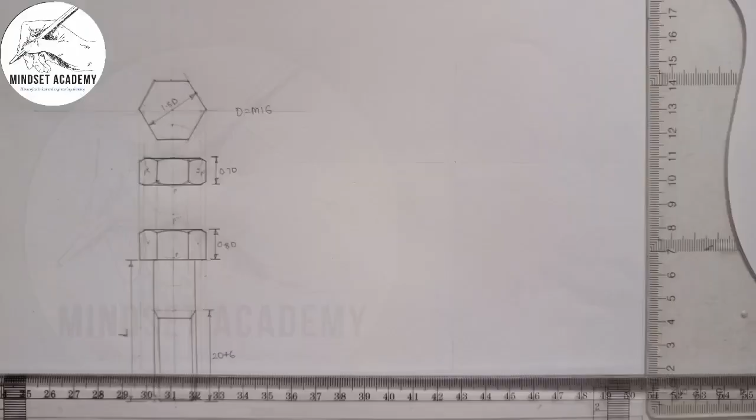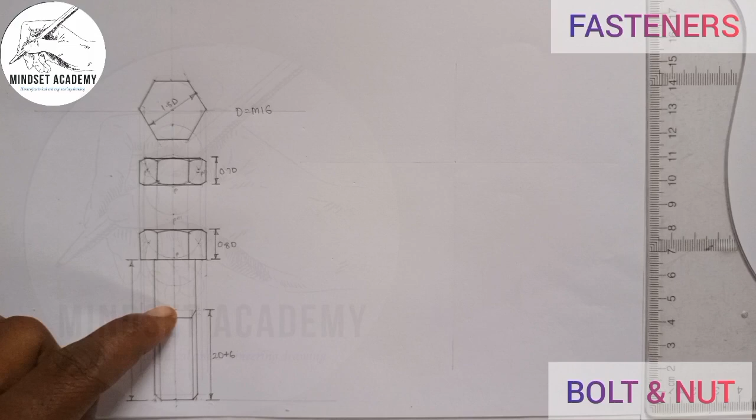In the previous video, we solved the problem involving a bolt and a nut that are constructed separately. A bolt is the component that has a shaft and a cap, while the nut is another component that has a hole. It fits together to tighten two or more materials together.

Now in this video, we'll solve another problem. This bolt and this nut are fitted together, and this particular bolt we're about to use is a washer face. This one is not a washer face. Is that okay?

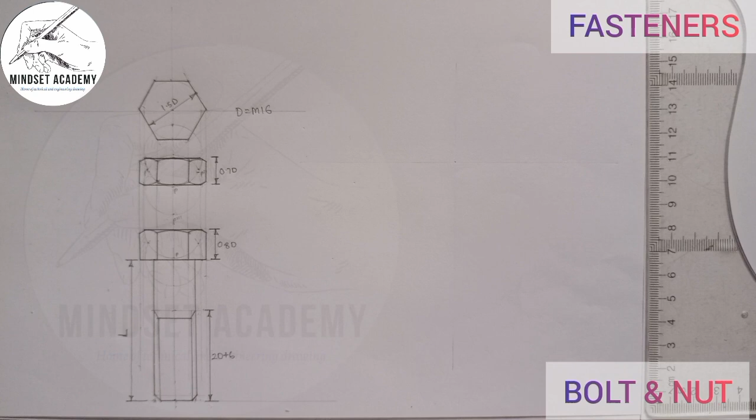So the question goes like this: construct a hexagonal headed bolt M24 with washer face head and a nut on it. Give the standard dimension and show your calculation.

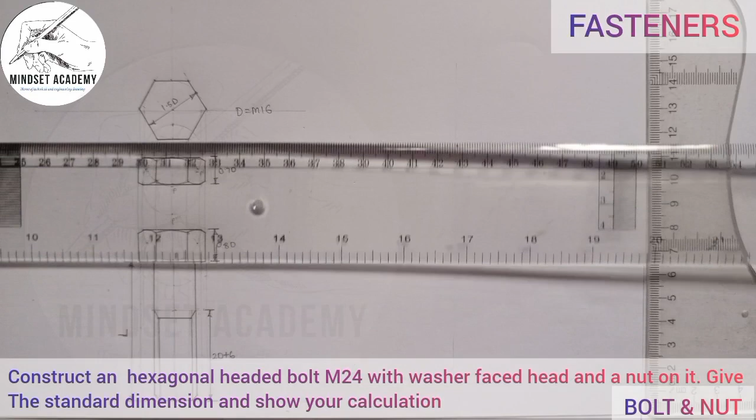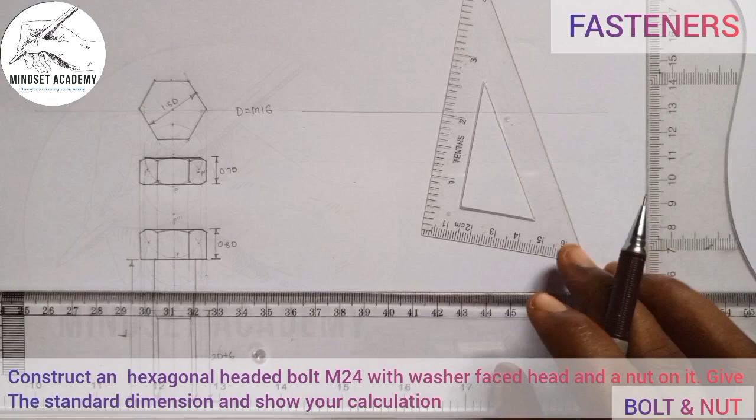So the first thing you should do is to draw your horizontal line this way. That's the first thing you should do. And the next thing you should do is draw the vertical line that goes through the horizontal line in this manner. You can decide to use this.

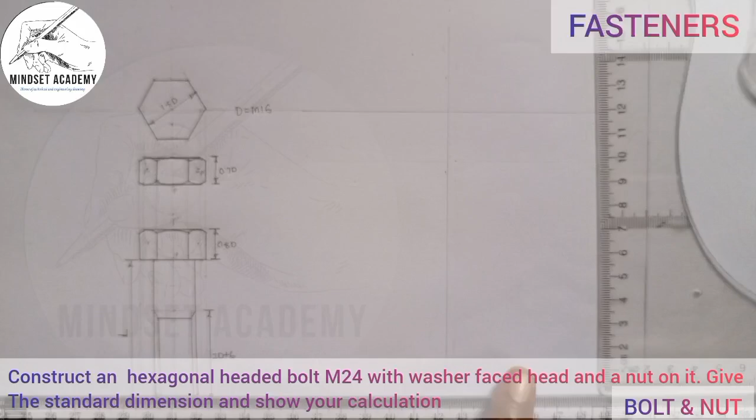And I'm going to draw this. Let's just take it down very well. You can see this is where it is meeting. And we are given it to be M24.

So to get the diameter, you multiply 24 times 1.5, and that gives us 36. So to draw a circle, you need a radius, and I'm going to measure the radius of 18, which is half of 36, and place it at this point here.

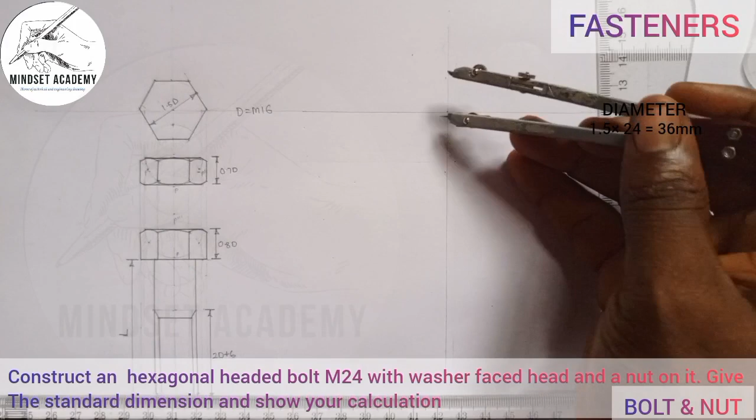Then I'll draw a circle. But normally the circle is always faint, I just did this way to show you.

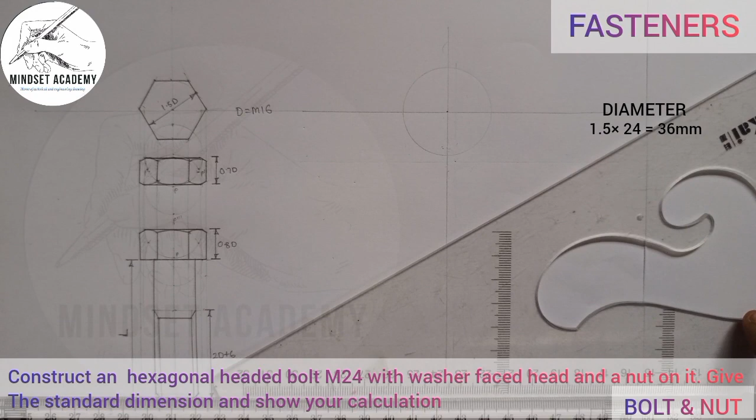So now the next thing I'll do is draw a hexagon across flat. I'm going to use this guy here, which is the same thing as this, the smaller version. Is that okay? So I'll just place it this way. Let me stand it up, and I'll place it this way.

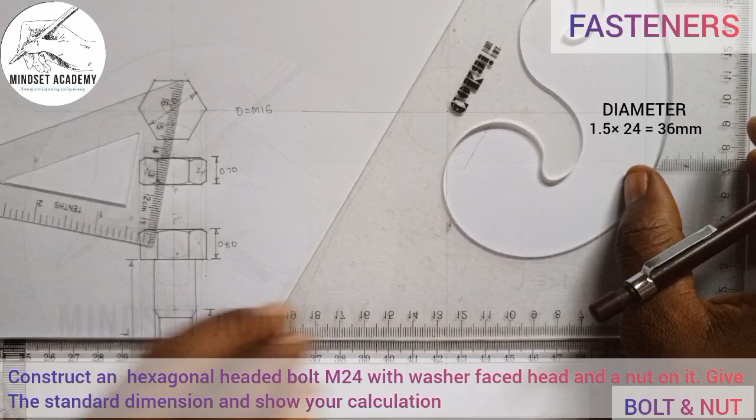Draw a line that is giving me this way. I'll come here also and do the same thing, moving it on my T-square. I'll have this way, right? And I'll come the other way around, and I'll have this way. You can see that? And I'll move it here also, and I'll have this way.

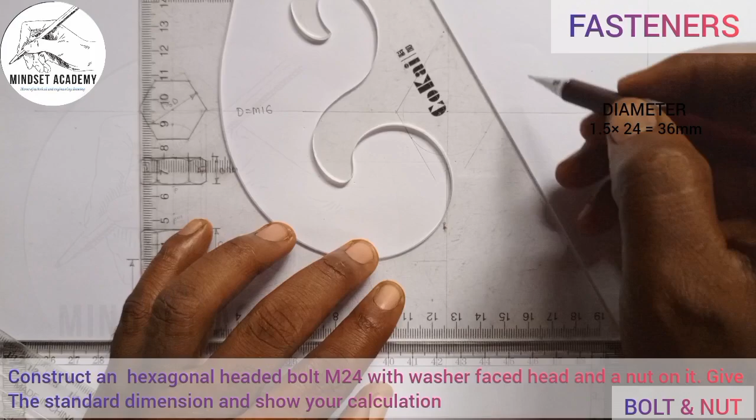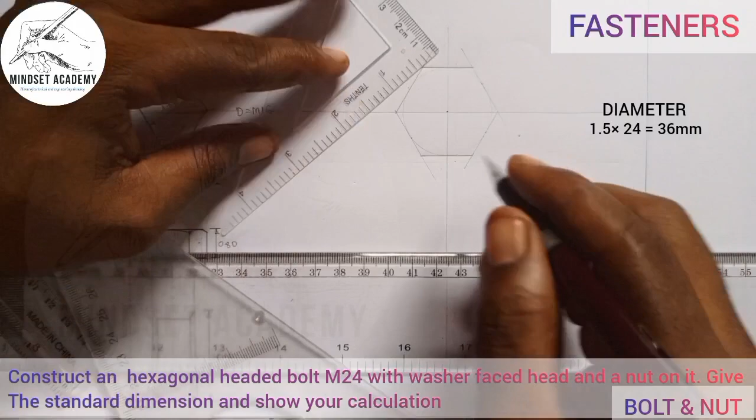So the next thing I'll do is thicken it from here to here, and from here to here. The rest, from here to here, from here to here, from here to here, from here to here. This is what we have here.

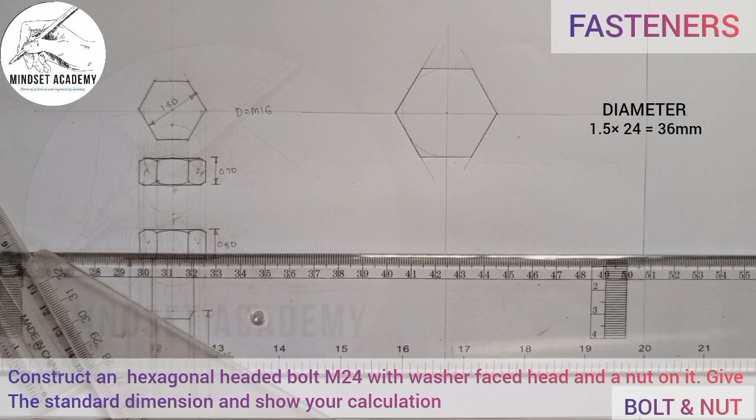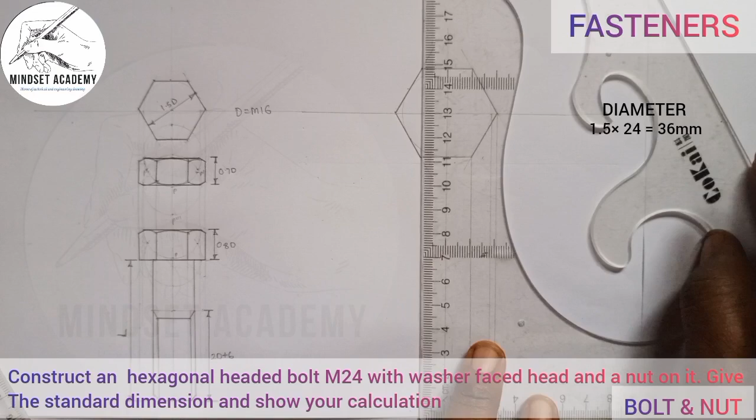Now the next thing I'm going to do is project this point down, each of those points, including the circle, the edges. Then this is what we have here.

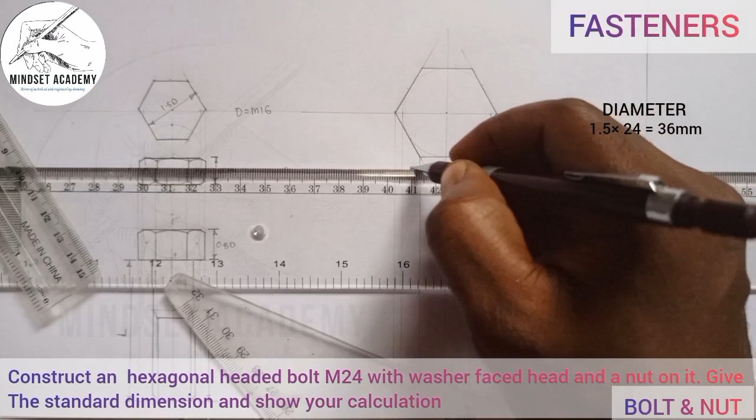Then I'll pick any distance of my choice, as long as it's not touching the plan. I'll just join the first point to this, that is the second point to the second to the last. And the next thing you do is know the thickness.

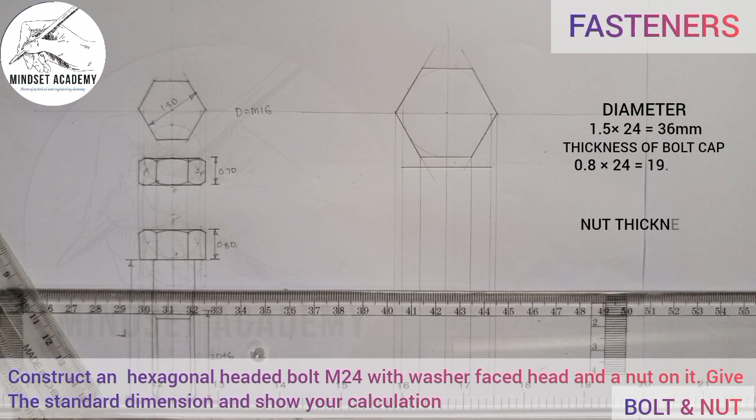That is the thickness. But now, don't forget we're dealing with the bolt, so the thickness of the bolt here is 0.8D. 0.8D means 24 times 0.8, and that is 19.2.

So I'm going to measure 19.2 as the thickness of the cap. This is 19 here, right? And I'm going to just draw my faint line first of all, this way, then I need to draw this cap very well.

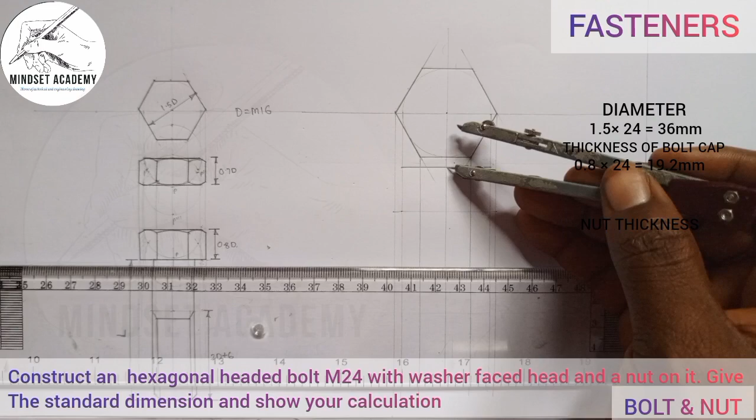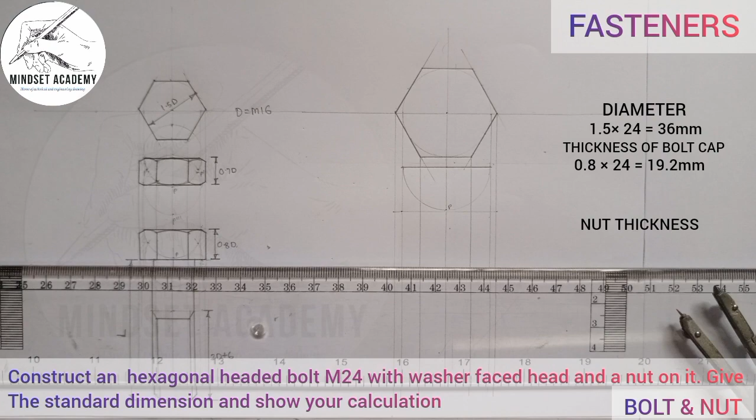So I'll take my compass to this point here, then I'll draw. You see that? And they're meeting here, that point I'll call point P, a silent P. Then from that same point, with the same radius, without adjusting my compass, I'll place it at that point P and draw another one again.

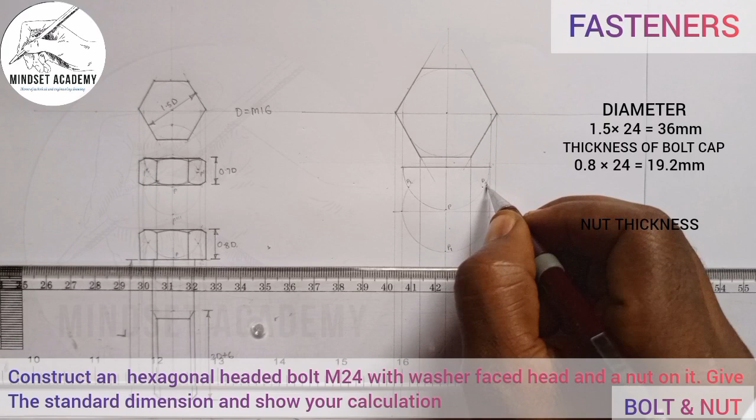Right, so I'll call this point P1, this one P2, this one P3. So from P1, I'll place my compass there, take it to the top here, tangential to that point, and I'll draw an arc this way.

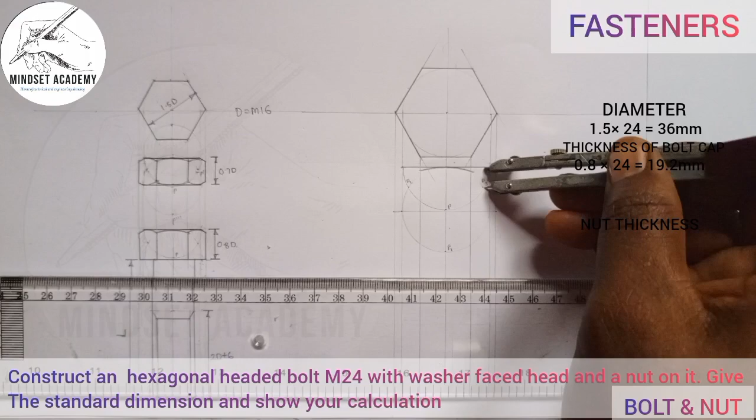I'll place it at P3 also, take it to this point where I can easily draw this way, touching this line there. You see that? Then at P2, the same thing is happening this way.

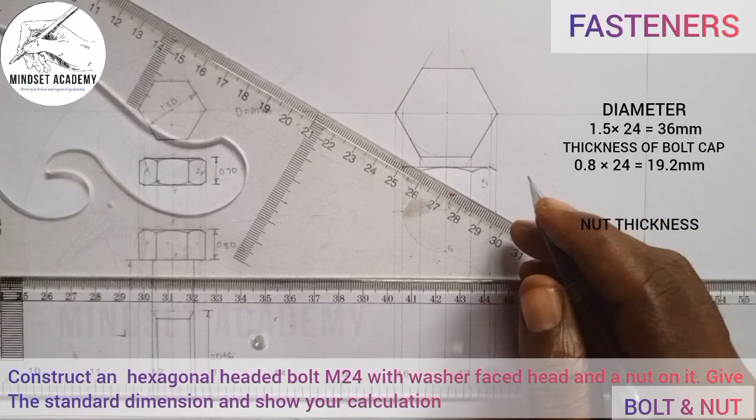Now the next thing I'll do is take your 60-degree set square, place it at an angle of 30 degrees. You draw the chamfer where you filed the edges, you call it the chamfer. Now come here this way, I'll chamfer it at an angle of 30 degrees, right, and bring it down this way.

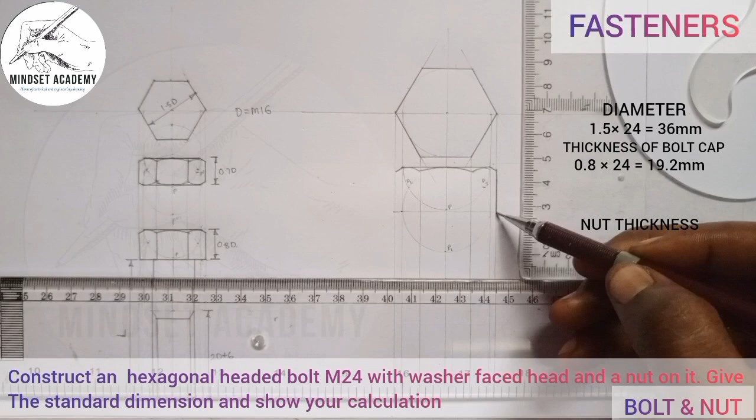Before I do that, I need to measure 10 millimeter - I mean like 1 millimeter up, because it's washer faced, right? So this is what I'm going to do, I'll just measure 1 millimeter up.

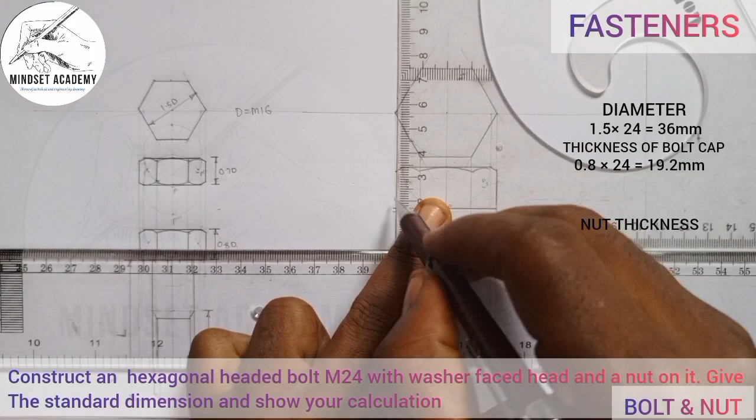Can you see that? Then I'll now draw it from this point, taking it straight down to this point, right, then bring it down. That is the standard - the 0.1 millimeter is the standard.

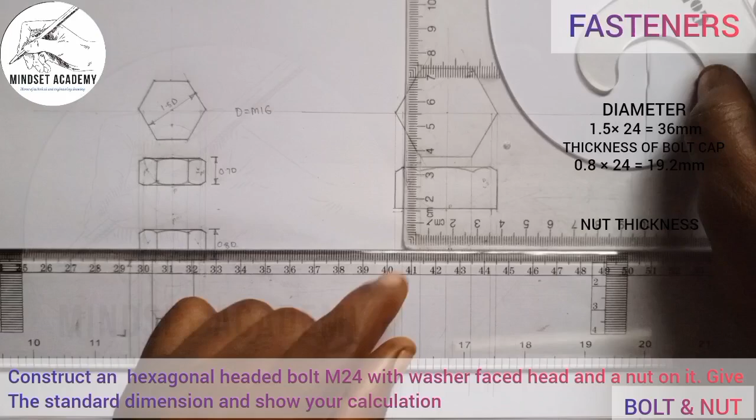So the next one will now be this point here, I'll bring it down. This point here, I do the circle, bring it down. So from that point, I'm going to just draw this to this point. You can see that? So this is what we call a washer faced.

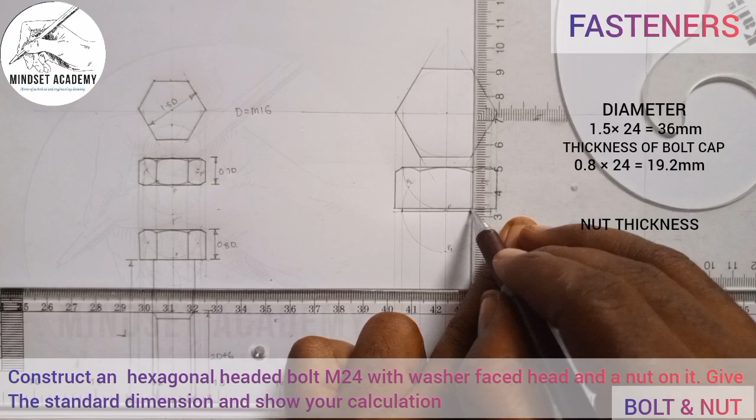See the difference? Now have this - is it different? This is just a bolt. This is a bolt, a washer faced bolt.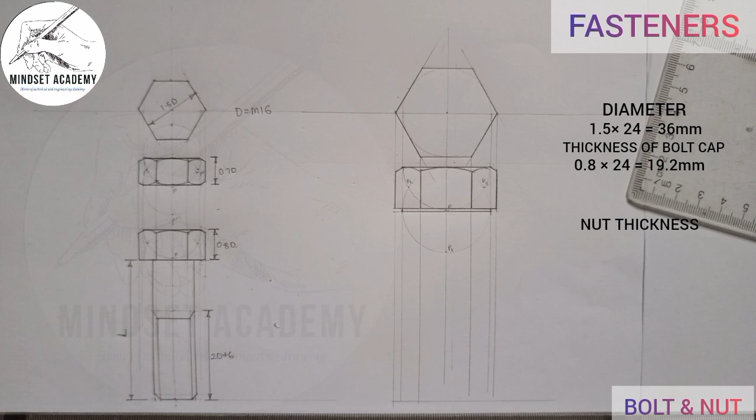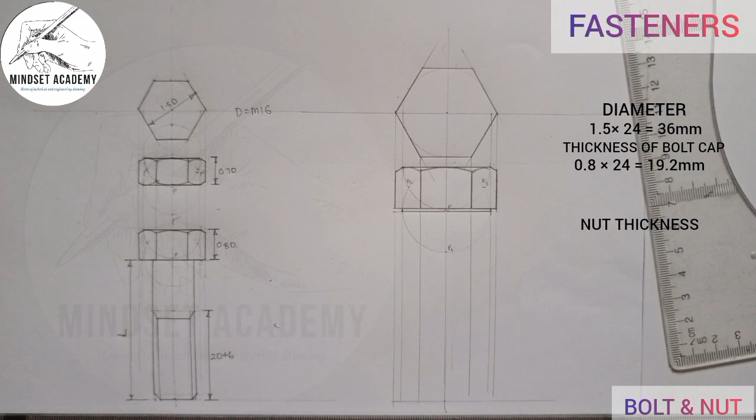So when I do that, I'll place it at this point, right? Since it's 24, I'm going to take my meter rule. I'm going to measure 24, right, half of 24 this way, which is 12.

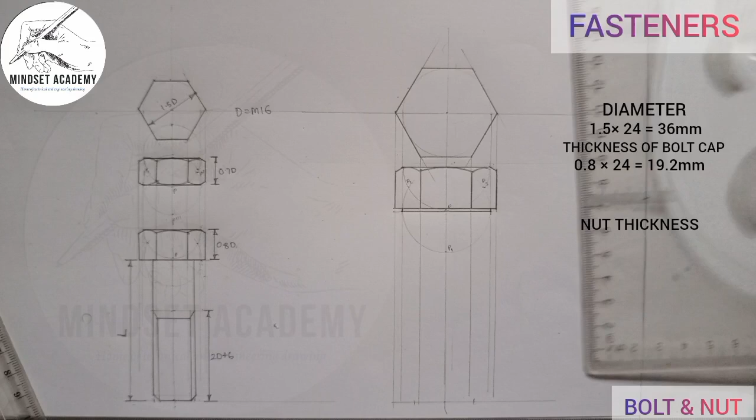You see that? 12. And I'll place it at the center line here. I'll mark to the left 12, also mark to the right 12. You see that? And I'll take it up. That is it, 12 and 12.

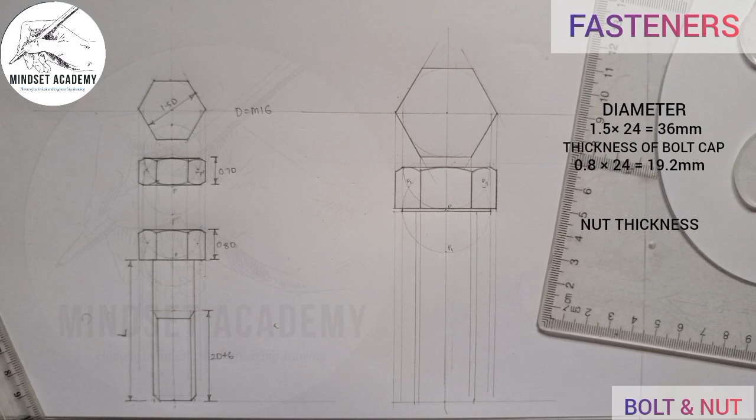Now the next thing is I'll measure 2 millimeter up. So again, I'm going to measure 2 millimeter up on that line - this is 0, 1, 2. So there's the line there, 2 millimeter.

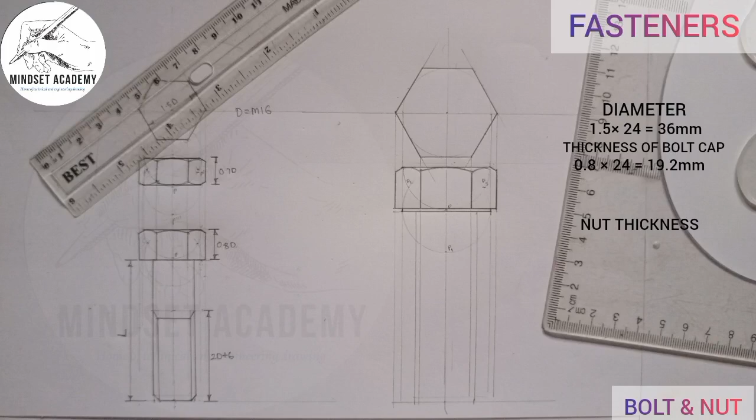Then I'll draw a line this way, so I'll bring the line to touch the base line at an angle of what? 45 degree. So I can use this and do it at an angle of 45 degree this way, and here also this way.

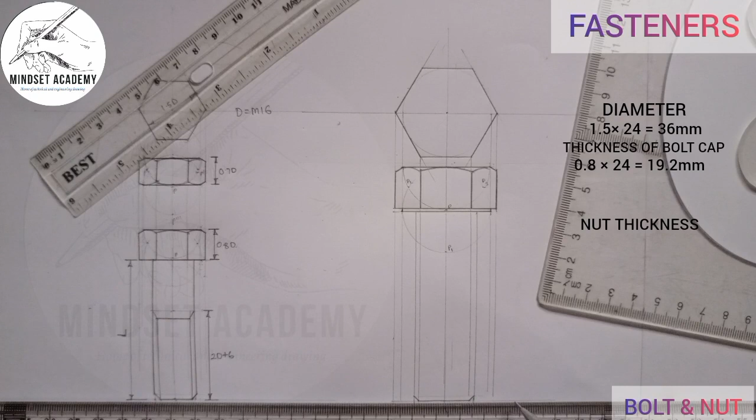Then I'll thicken it this way, right? I'm going to thicken it this way too, right? And it's already going up, which is already there.

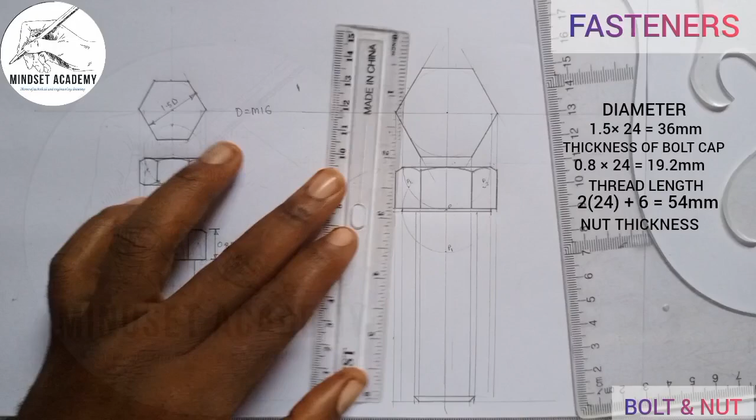I want to know the length of the threading, and it's always given - since it's not more than 125, you'll be using 2D plus 6. So 2D plus 6 will be 2 times 24 plus 6, and that will give us 54. So I'm going to measure 54 from that point, from 0 to 54. This is 50, and this is 54 here. So that will be the length of the threading.

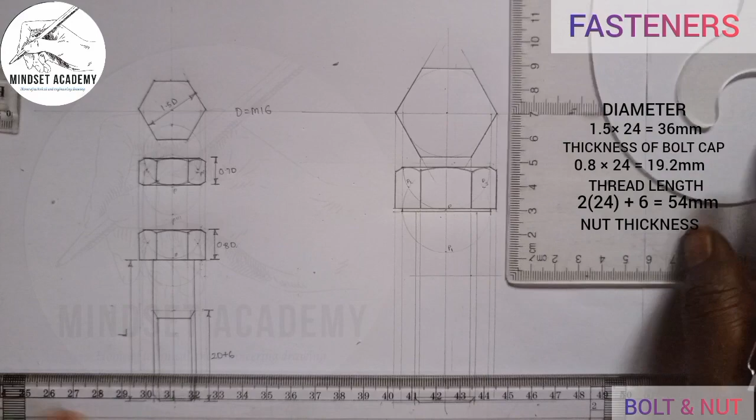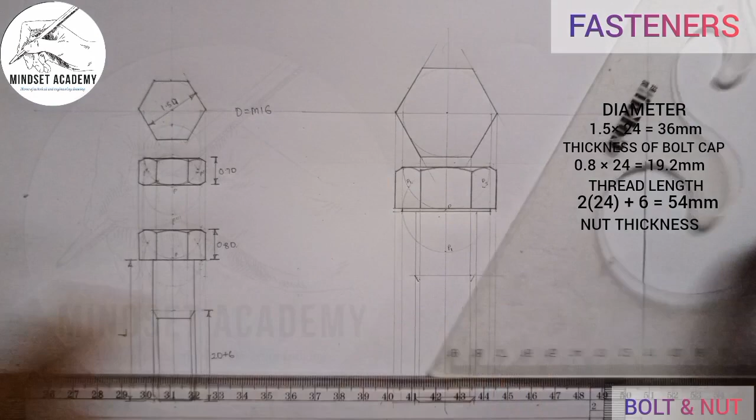So I'll just get this way, right? So from that point, I'm going to bring it down at an angle of 60 degree downward. You can see that, and I'll take this way also, an angle of 60 degree downward. Then I'll just join here.

Now, why I'm not taking them is because we are told that the bolts and the nuts are together. So taking them together, I want to put them together. So I can just choose any distance here to place my nuts. I can just draw a line at this point this way. Any line at all, but don't forget it should be the same length as this, since this is stopping here, so we're having the same length.

Is that taken? So what did I do the first time? I'll now join this last point, which I join here, to this point also. So taking it from this point straight down to this point.

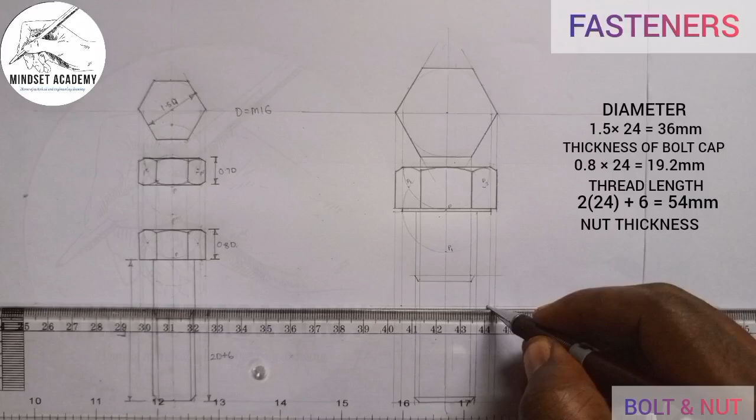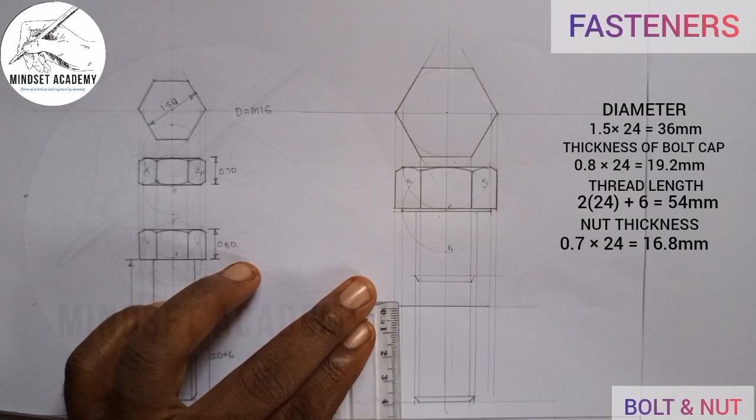You can see that. Now the thickness should be used, since what I'm using for the nut is 0.7. So 0.7 times 24 will give us 16.8. So I'm going to measure 16.8 from this point. This is 16.8 here, and I'll close it up back again.

The same thing, I'm taking it from this point straight down to this point. Now I'm not doing the same thing I want to do. I'll place it at the center here, just at this point, and I'm going to draw a semicircle.

Where it meets here, do the same thing. I'll draw another semicircle, you see that? So this point here is P. From P, I got P1. This is P3. This is another P2. So from P1, I'll place my compass at P1 to this point.

I'll draw, this is the line here. Look at that line. This is where to stop. Can go to that point, to the next one. You see that? Then I'll place that at P3.

I'll do the same thing, this way. You see that? I'll come to P2, radius here too, do the same thing.

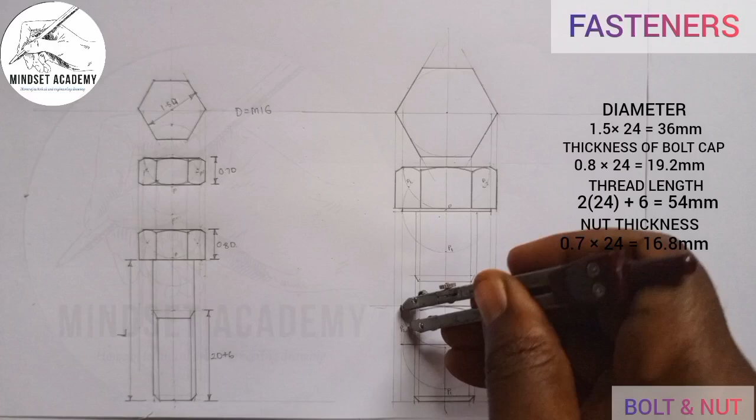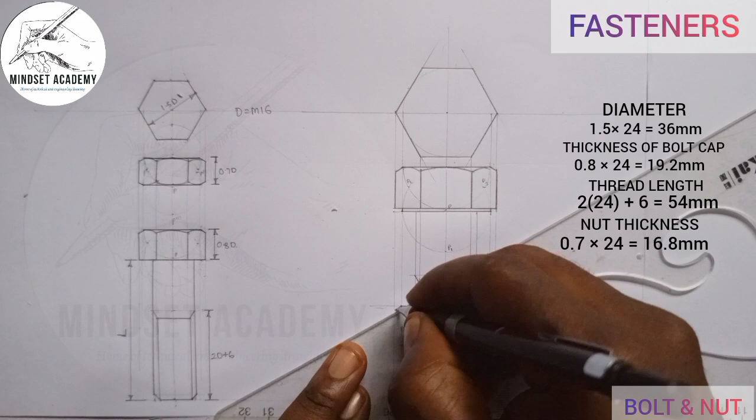You can see that. Now the same thing, I'll now chamfer the edge here with the help of this 30-degree set square. I'll chamfer this edge, and also I'll chamfer this edge. And what I did here, I'll do it for the other side too.

Now I'll place my compass at this point here, and I'll draw the semicircle facing the one this way. I'll draw this way. I'll come here, I'll cut this way.

So what do you notice? It is meeting at this point here. Call it P3 again, and it's meeting at this point here. This is another P2. Then we have this here.

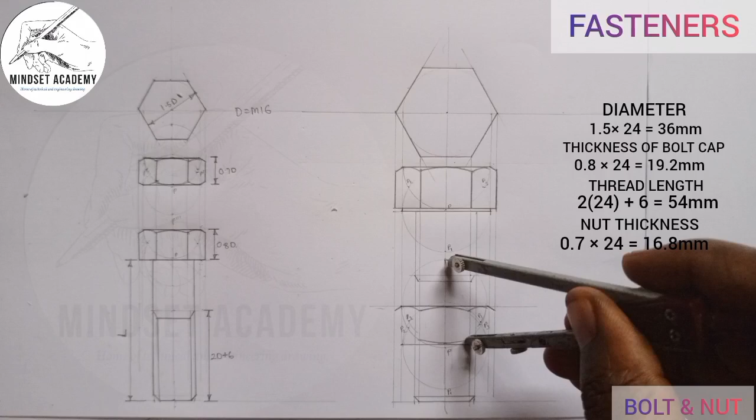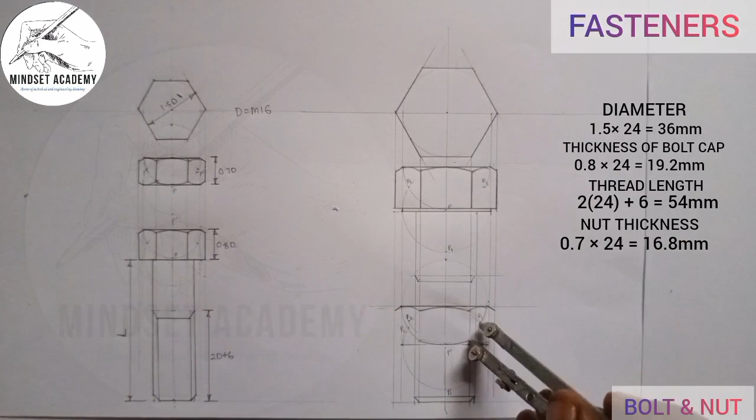So place my compass at this point here. Take it here to do the same thing, repeat the same process. I'm going to now come here. After I've done that, I'll come here, I'll do the same thing here. Then here too, I'll do the same thing.

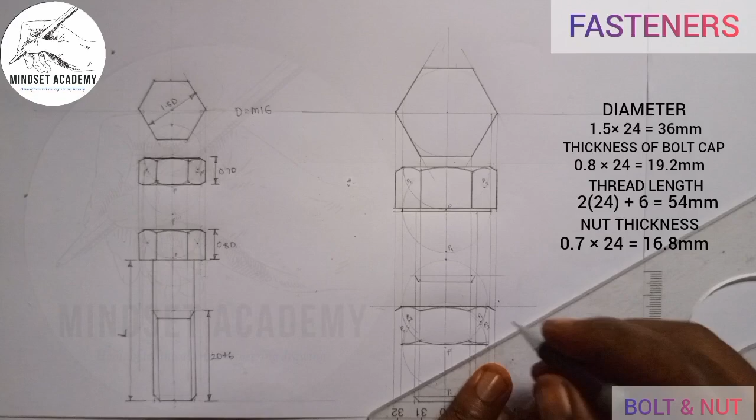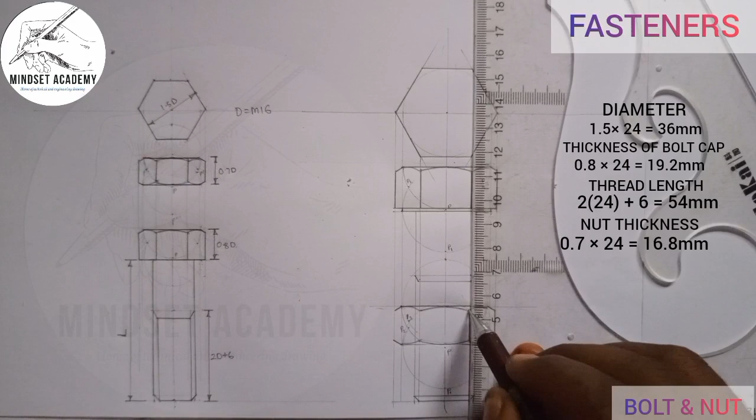Now I'll join. I'll chamfer here first of all before I join. Chamfer here. Come here. Chamfer here, and I'll close it up. Close it up. Close it up. And close it up. You can see that?

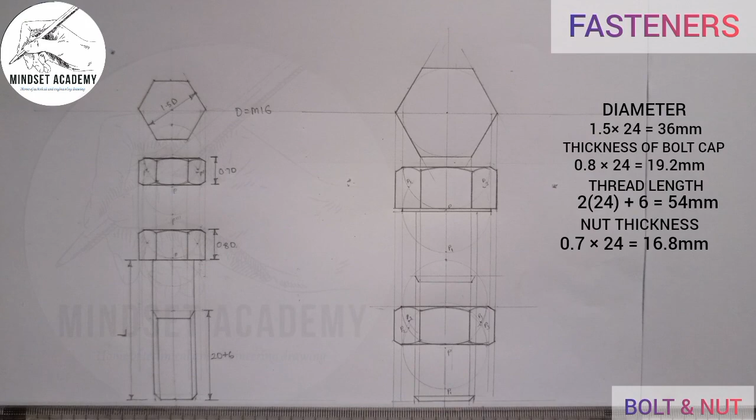And that's still thicken here if I want to. Now we've drawn out the bolt, so I'll now thicken the rest of it. Look at what I'll do from this point. I'll just draw this to touch here, and to touch here.

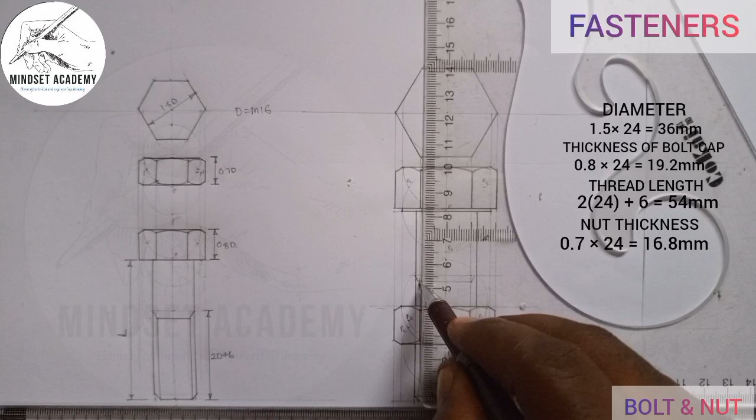I'll just draw this to touch here, and to touch here, and here too. To touch here, and to touch here. Then here too. Here and here, and here too.

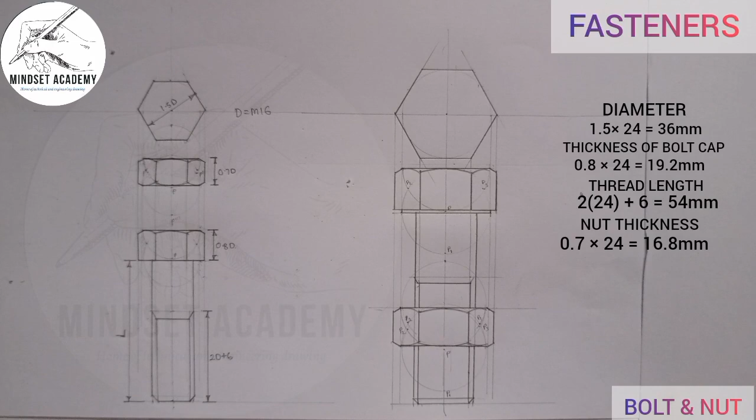You can see that? This is what we have here. This is when the bolt and the nut is, the shaft of the bolt is entering the hole of the nut, right? This is what we have here. So just like I said earlier, same thing happens. This point here to this point here.

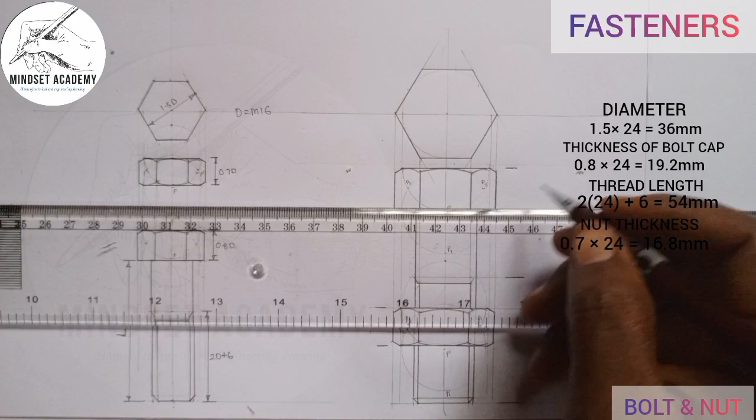Then we have this point here to this point here. Then we have this point here to this point here. We also have this way, and we have this to this. So let's move and see.

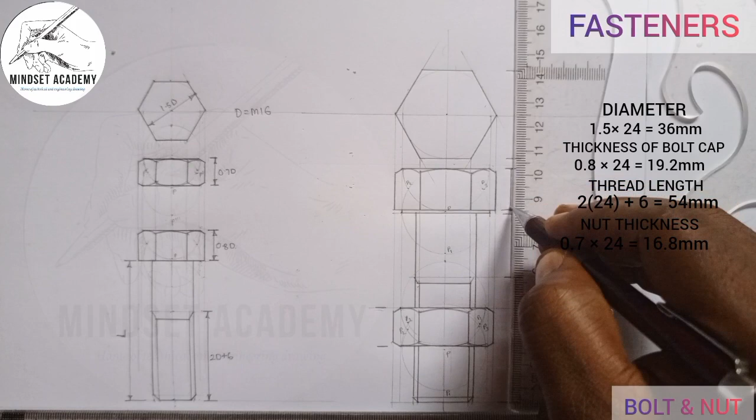So the distance from this point to this point is this. Then this to this, this to this, this to this. So then this is 2D plus 6.